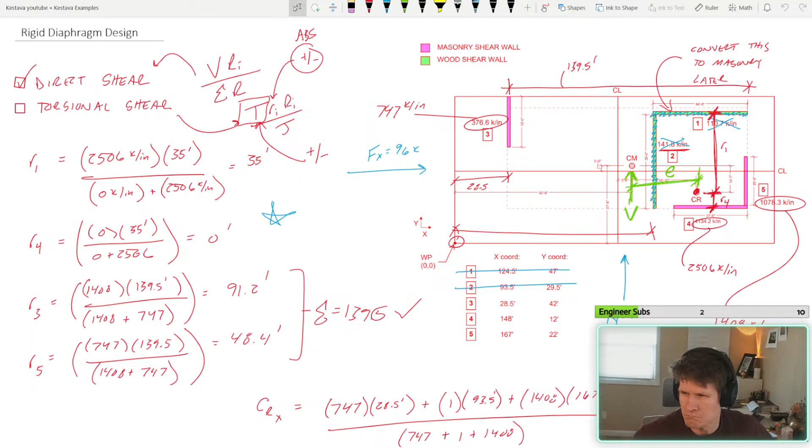Swap over to the spreadsheet. Hey, I'll be back in 2 seconds, I'm just gonna grab my hot water.

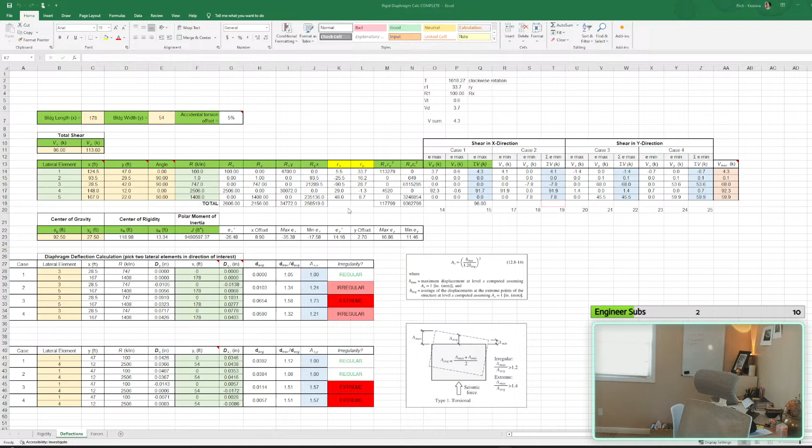Back. When am I planning to take the exam? Believe it or not, I think so. I have the morning portion of the lateral exam and the afternoon portion of the lateral exam decoupled now, so I have to take 2 sessions. I'm signed up for the morning portion, and loosely, I kind of want to take it like beginning of March, maybe first or second week in March. So that's the plan as of right now. So over this month, I'm kind of locking in and going to refresh myself on everything and rearrange my study preparation because it's computer based. That's more of the time I think I have to take, is figuring out the new format. So you'll be seeing me a lot more over the course of this month.

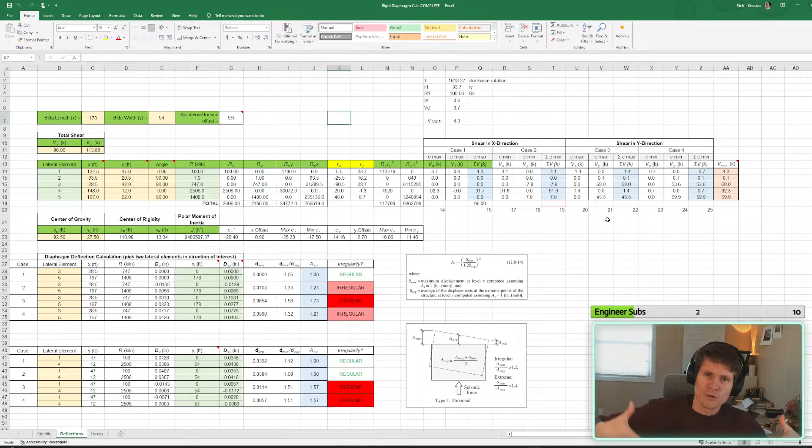This is hopefully something that you see in front of you here. This isn't like a homework assignment. This is something that I want to be able to use in my professional career as one of those tools in the utility belt that just helps you perform better as an engineer.

No problem, Kamala. What's the typical salary for a structural engineer with 8 years?

Boy, isn't that the million dollar question? It's not a million dollars, unfortunately. I don't want to give you a roundabout answer, but it can vary. For structural engineering consulting in the US, it will vary based on where you are. If you're in a more expensive city, the salary should be a little bit higher for cost of living purposes. If you're in a smaller rural area, it will probably be less for that reason.

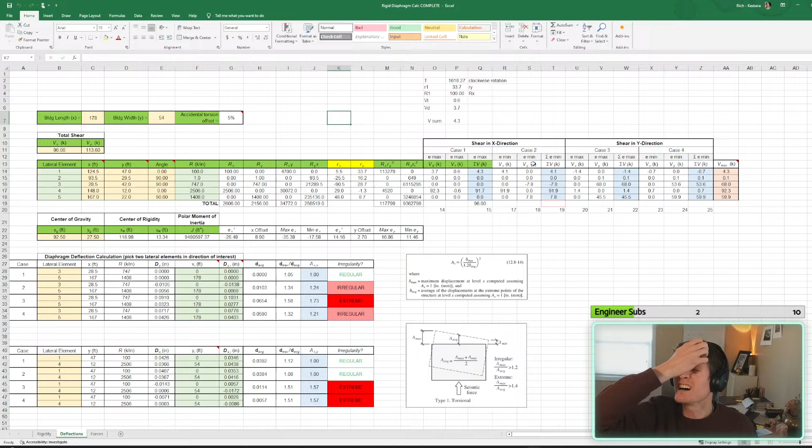For consulting purposes, not anything specialty related, so nothing like a structural engineer for a utility company or a very specific niche system—if it's buildings, 8 years experience, probably anywhere from 90 to 120K range, I'll probably give it, in my opinion, which is kind of sad. I'm at like 105 right now, I think, just at baseline.

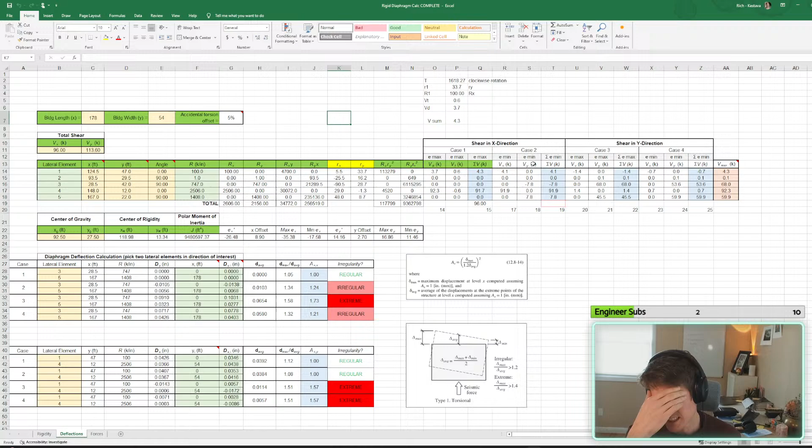Which field would you say gets paid the most in the civil field? I have a couple of buddies—one of them is transportation, one is geotechnical, one is environmental, and then I'm structural, and I have another buddy in structural. So I have a nice little pool to pick from. We're all decently similar.

It'll totally depend on the type of company you work for, but I think my transportation buddy makes the most out of all of us—I think he's like at 130K, I'd have to ask him again. At one point he was pivoting a little bit, kind of drifted from the transportation part into smart technologies, like ITS systems, intelligent transportation systems. I don't want to say techie by any means, but I think there's more money in that sector within transportation engineering, which equated to more potential financial gain.

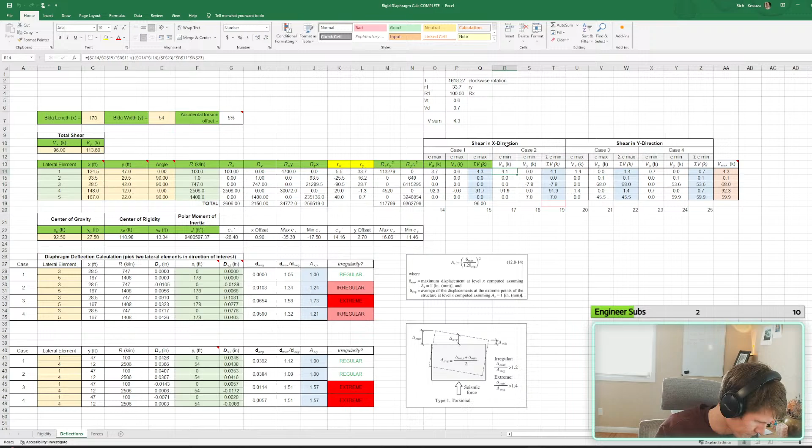Which should be easy enough, because it should just be: case 1 is E max, case 2 is E min. So we should make sure everything's locked in.

That's right, that's our direct, so we don't use our eccentricity.

Hey! Rajan, welcome in, fan of your funny YouTube shorts. Hey, let's go! Someone calling out the shorts. It's the fun little thing that I do on the side that I think hopefully everyone gets is lighthearted and fun. Hey, glad you popped into the auditorium. Oh, Ryan popping in. Hey, what's going on, Ryan?

Sweet spreadsheet? Yeah, we're putting a little something together. Troubleshooting here, not trying to make the world's perfect, all-encompassing, rigid diaphragm analysis, but trying to make something simple that kind of works out. But it was giving me a couple of problems, and I'm fixing it up. So going through it from start to finish, trying to make sure the direction of all of my shear to each of the vertical lateral elements is properly being analyzed in the right direction. But we'll see, we'll see if it all works out.

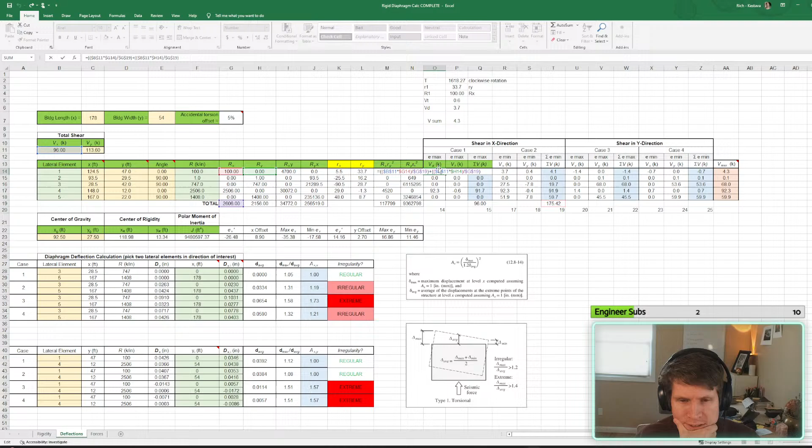I need to be careful here, because I thought last time I could combine both my X and Y together, since I'm only analyzing wall lines that are not at angles. I think that should still work. I just need to bring this down. Oh, it doesn't work anymore.

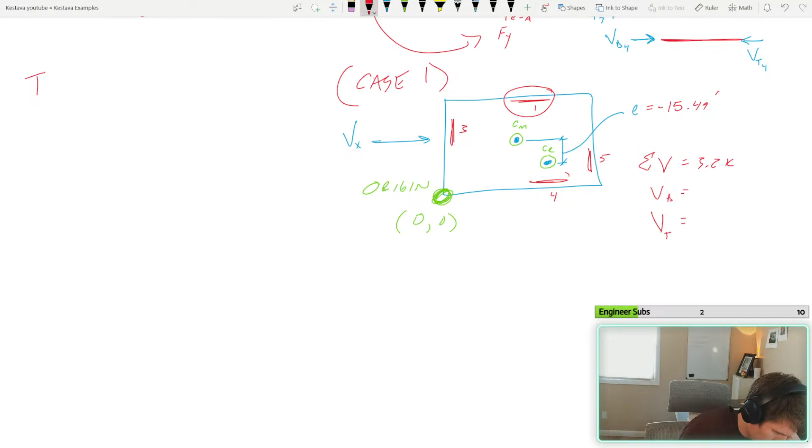All right, so direct shear 1 and 4 should be taken as huge numbers, except 1 is not a lot of stiffness in comparison to 4, 2,500. So 1 is basically going to see nothing in direct shear. Yeah.

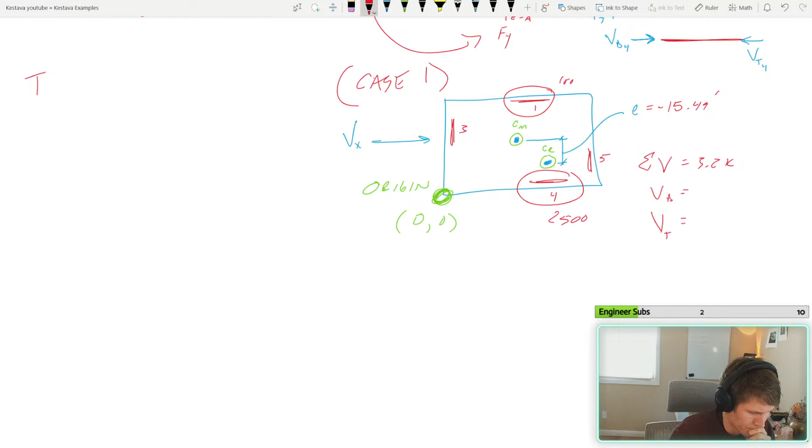Okay, our torsion is happening, so it's going to... Yeah, we have this going on up here. So shear wall 4 is direct is additive and torsional is subtracting for shear wall 4, which that's spot on, and then it's add for that. That works. Okay.

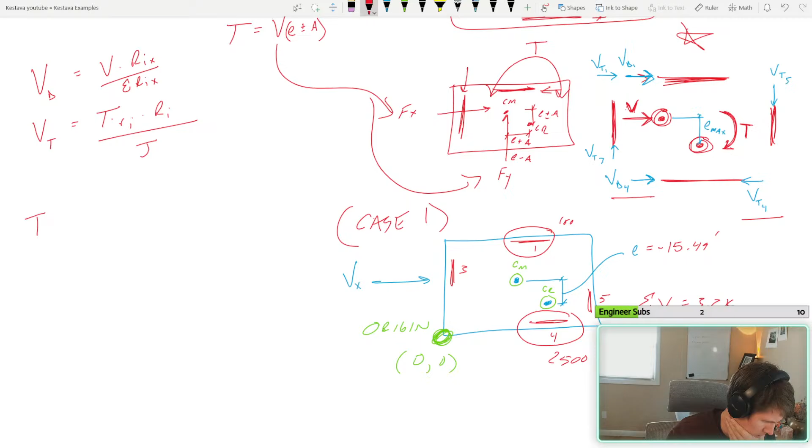And then the only thing for case 2 is we're switching this out for E min. Okay.

Curious, kind of curious, if wall line 1 goes to 1... oh no. That's not right.

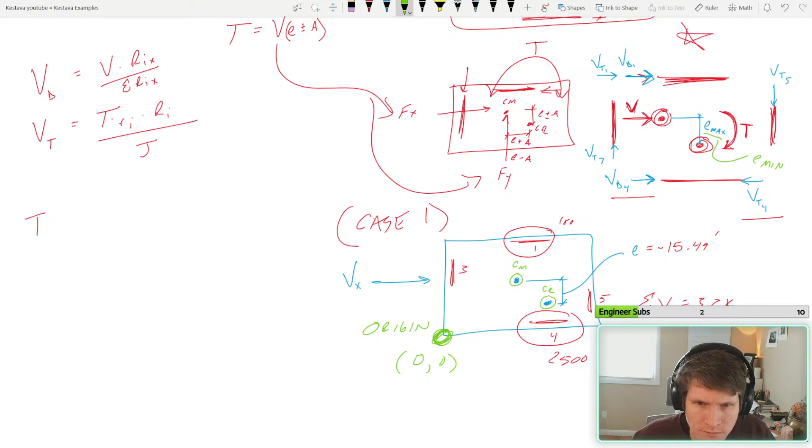Oh, there are values there. See, but I have a problem with that because I feel like all of my walls should be engaging here, at least from the torsional effects. Or I guess...

Because at this point, now there's no wall. So walls 3 and 5 should be seeing some torsional shear. And they should be seeing it in the y direction. That's where I'm like...

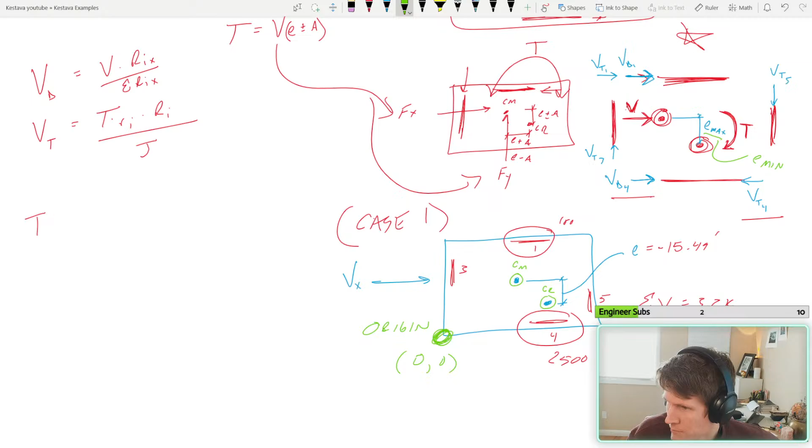Jack, hey, welcome in. Tuning in late, it's all right. You're never late. Did you mention where your sample questions are from? Did you make the spreadsheet?

So I've been building this spreadsheet. I started with one that I didn't think was quite doing things the right way, and so I've been building off of this. I think I'm almost there, but we'll see. I know the results that I'm looking for, but yeah, I was working on this last night, and I'm hoping to wrap it up today in this session.

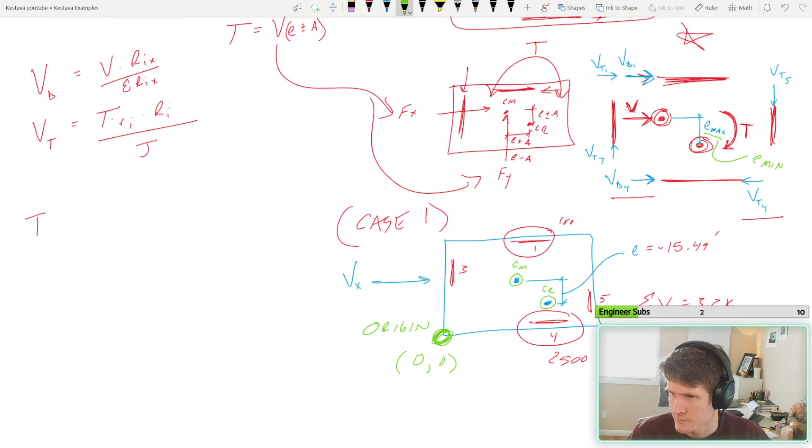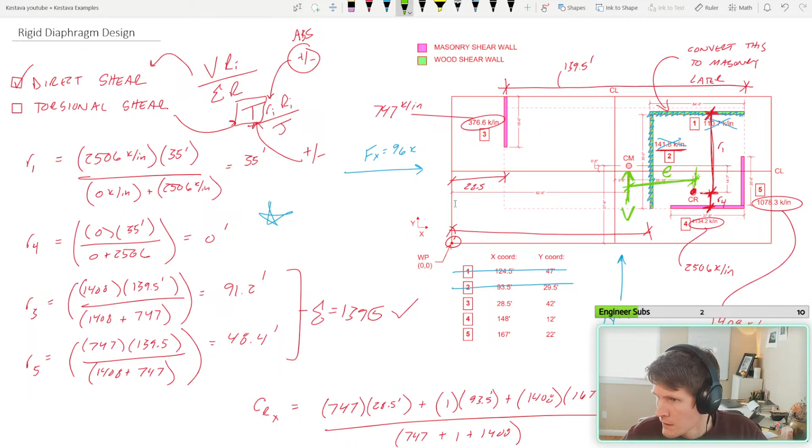But the example is, oh shoot, you guys aren't even looking at this right now, sorry. This is my problem that I have. So yeah, that's the dealio.

I know, there's a lot going on there. I'm kind of just working through this at my own pace. I want to get this locked in for me, and then obviously if people have interest to this, I'll do my best to relay it to you and the things that I've done.

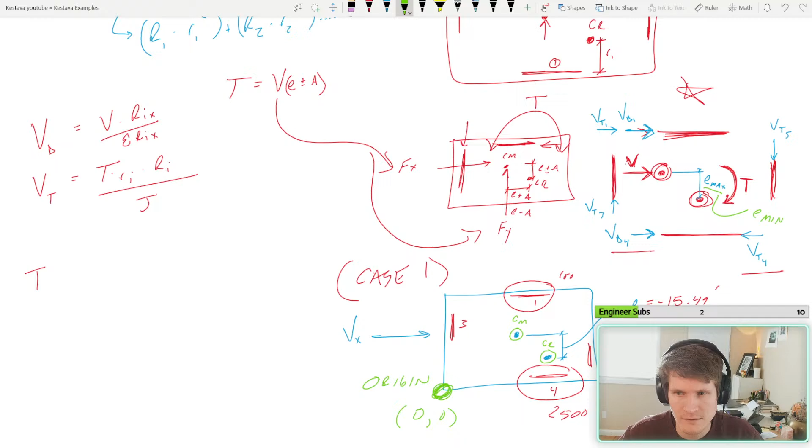And for anyone from last time, like if I switch this, if the summation of these loads don't equate to the total story shear in the direction that we're analyzing, then we have a problem. So I have this little conditional formatting set up. So if that flares up, we can visually see that there's an error, but we're locked and loaded right now, so that's good.

All right, case 1 and case 2 are done in my opinion. Let's green them up. All right, now we're moving into shear in the Y direction. Very good, very good. All right.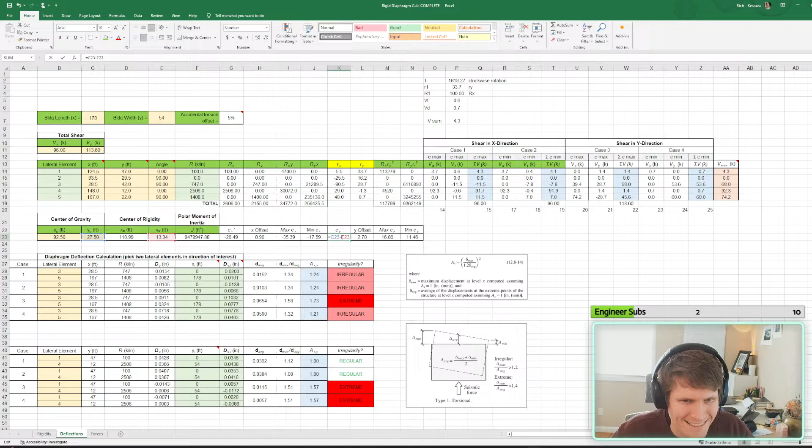Shoot. So is this technically absolute? I hate putting absolute in this. Technically, this needs to be... and now these are reversed again.

Okay, so I'm gonna flag this as yellow, I need to think about those. These are fine, those I get, that's okay. Now, you should be seeing that and that, just adding to it.

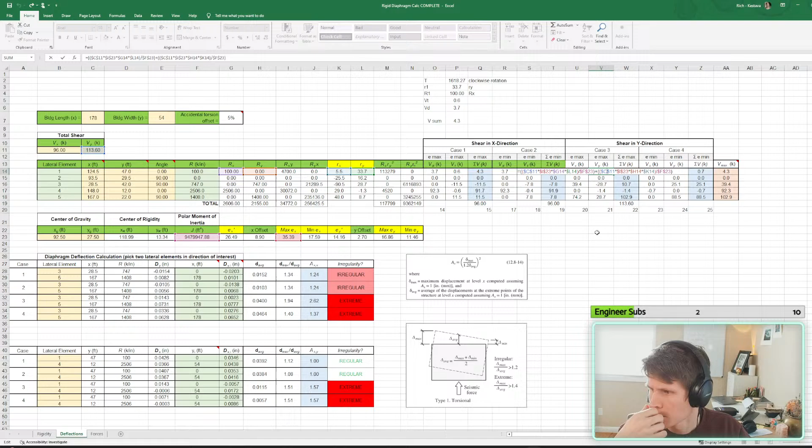Yeah Kevin, that's something I gotta figure out, this is something kind of new, I want to start sharing things that I have, use, create. I just need to think about it and be careful of what that entails. I don't want to be saying that this does something and then it doesn't. This is just me messing around. So if you send me an email, yeah, I could send it to you direct, totally.

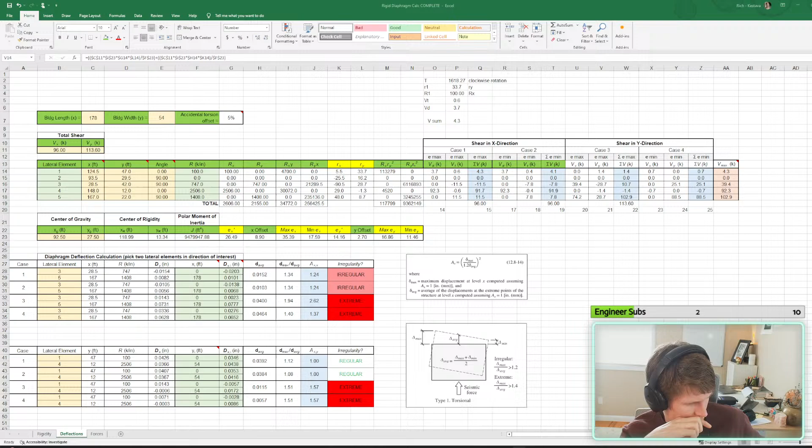Unless I'm like tripping? Not tripping? Should be.

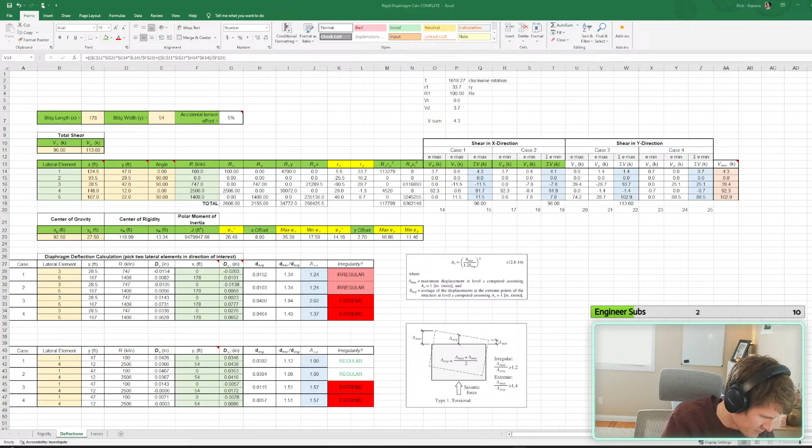Oh, I already got it. It's gonna be minus, plus.

V1 is plus, V2 doesn't exist, V3 is minus, V4 is minus, V5 is plus. Okay, so that works like that. Those are working.

Why are you not working? One should be plus. It's good. Okay.

All right, so 1 is plus, 2 is 0, 3 is plus, but it's minus right now. Why is this minus? Oh, because my Rx is minus.

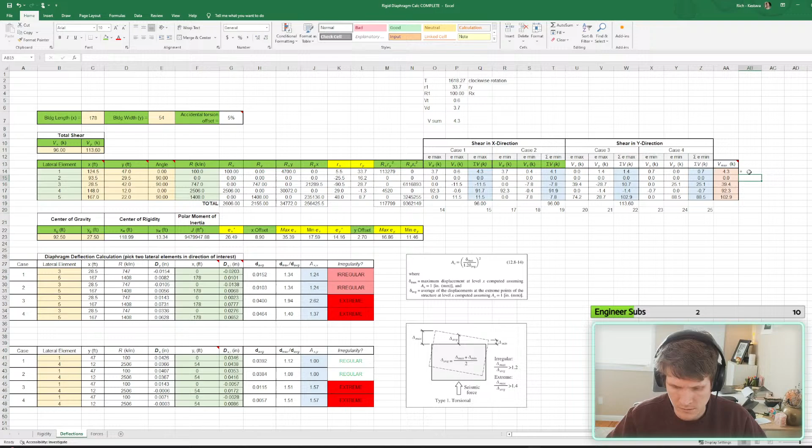I'm just gonna do this, just so I remember. So plus, just nothing. Three should be plus. Four should be minus. Five should be plus. Okay. Like, so, yeah.

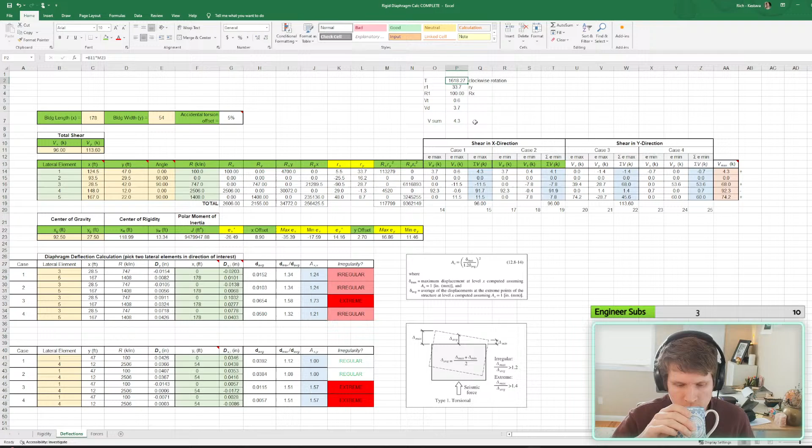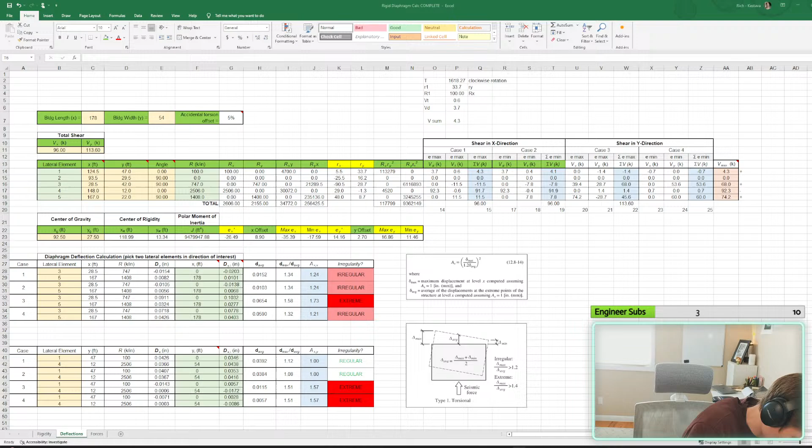One of my problems is I feel like I should be utilizing that clockwise is negative, which means that this should be a negative number, which means that should be a negative number. So it should be taken from that, which means that these also are reversed. I mean, it would just mean reversing everything.

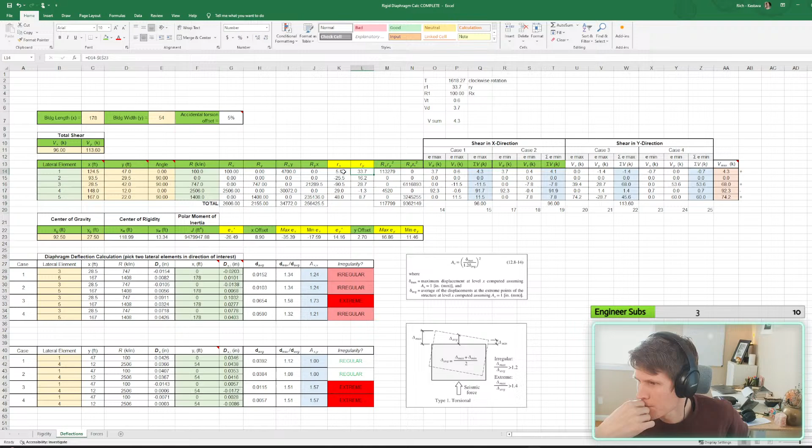Joey, welcome in, Joey Falcon, that's a sick name. Did I ever consider bridge design instead of buildings at any point in my career? Actually, my whole life as a kid, that's where my love of structural engineering came from. I thought bridges were the coolest things in the world. I messed around and tried to build little bridges over rivers and stuff all the time. I always loved being in a car driving over big bridges, any type of bridge really, but bigger bridges obviously were way cooler. So that's where it all stemmed from. And then actually, unfortunately, in college I took a bridge engineering class, and it was so chaotic that it just kind of shell shocked me into being like, whoa, I don't want anything to do with bridges. So I unfortunately lost my flavor for them, and that's where I decided, from that point on, I'm not going to look to do bridge design. That's not to say I don't love building design, I really just as much love skyscrapers, tall buildings, I always had a passion for that as well. So I have worked on some bridge stuff here and there, nothing major by any means, but now that I'm a little more open-minded to learning things, not being scared of things, I would love to get involved with a bridge design one day. So, yeah.

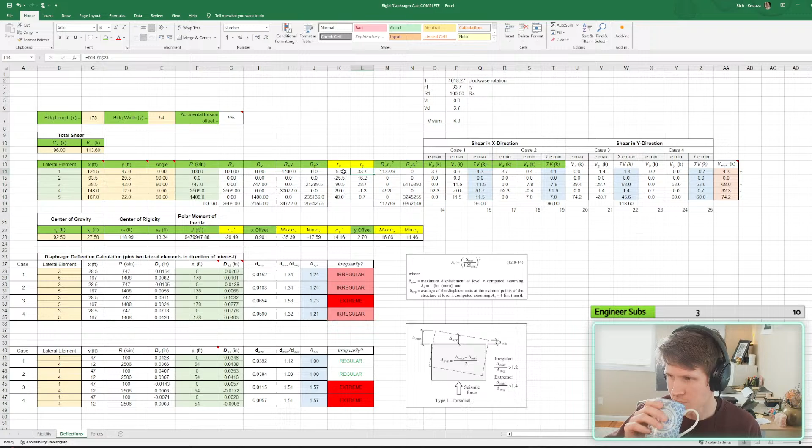I'm gonna screenshot this. Let's see.

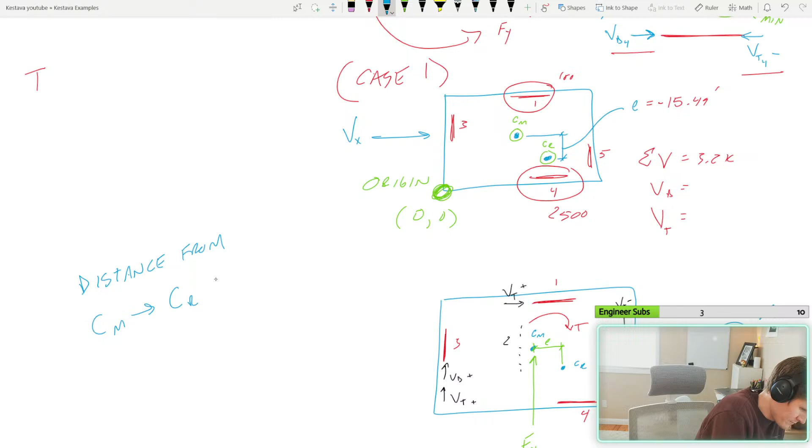Would mean it would be, we're going down, so it would be negative.

Okay, reverse. Out of there. Oh, was that my only problem? And we'll figure it out in a sec.

So in that case, so it's negative, so it's CM, center of mass, so it should be minus center of mass. Minus center of mass. Center of rigidity.

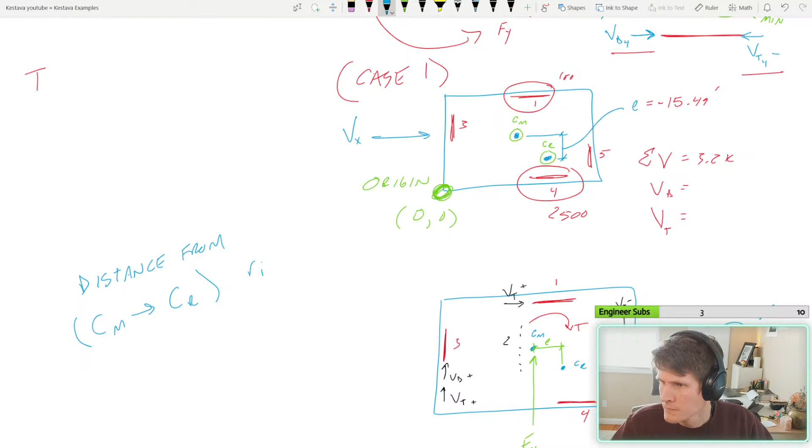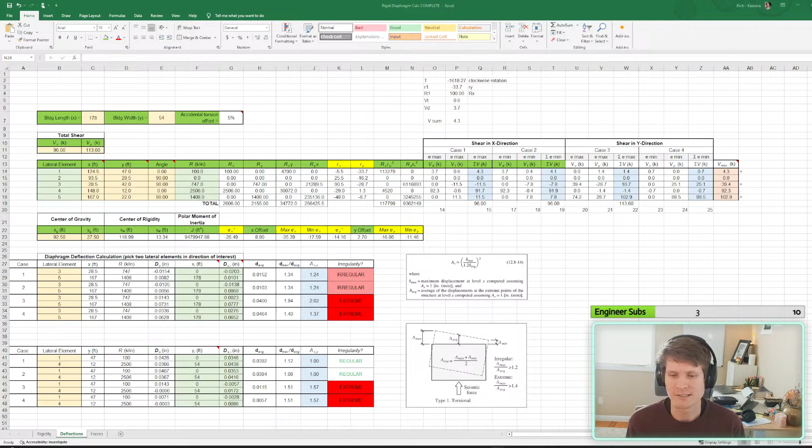You're currently in your first year of work out of school and work at a firm that allows me to do both, however not sure if I would benefit from focusing one or the other. No, I was at a firm that did both. So if you have the opportunity to get exposure to each of those types of designs, I'd say that's a great starting point, as long as you obviously like the company. Having a portfolio that encompasses both isn't rare, but it's not common either. So to have the ability to say, hey, I want to work on a bridge, or I want to work on a building, and then talking to your principal or project manager and them being able to supply you one is pretty clutch, because you'll learn more quickly, because you don't have to wait for a project to arise. It could be years down the road to get your chance to work on it. So yeah, I think that's good.

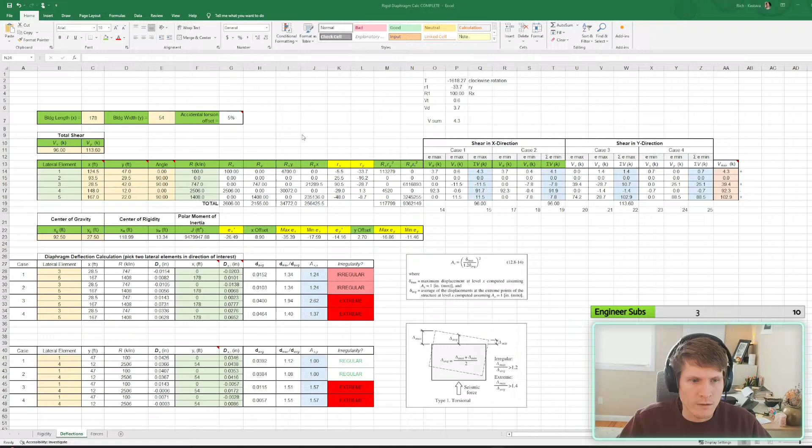All right, now we're rolling a little bit here. I'll zoom in, I don't know if anyone can see all right. Okay, now my clockwise is accurate. It's negative as we're doing clockwise.

My problem is these aren't, my eccentricities are—I'm gonna go actually red, let's fill them in red. These are not great because I had to swap them based on, to make them work to get the correct things, which isn't good, because if these center rigidities and center of mass switch orientation between one another or relative to one another, it's gonna create an error in my spreadsheet.

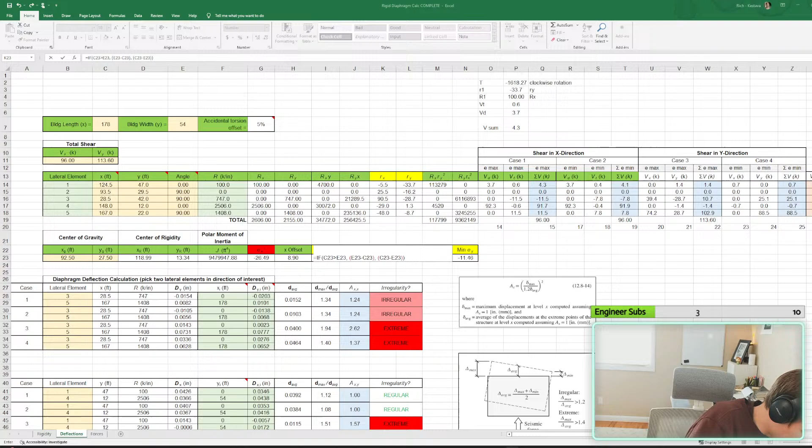So if this is greater than this, then it's going to be this minus this, which gets you a negative number, so that's good. But if YG drops below YR—so if your center of mass drops, I'm drawing over here to the side, sorry—if that drops below, CM is less than CR, then that's going to create a counterclockwise torsion, so that's positive. So we want our E to be positive. So then it's going to be, so...

If this gets less than YR—no, that should still work. Then it's still the same thing. So it would be like if this was 10, like here, we know this won't work because if this goes to 10, it's still going to be a negative number, which doesn't work. Drops below, then it can still just be, I don't have to be fancy with this. Because if this was 10, then it'd be positive. Yeah.

Okay, so that one works.

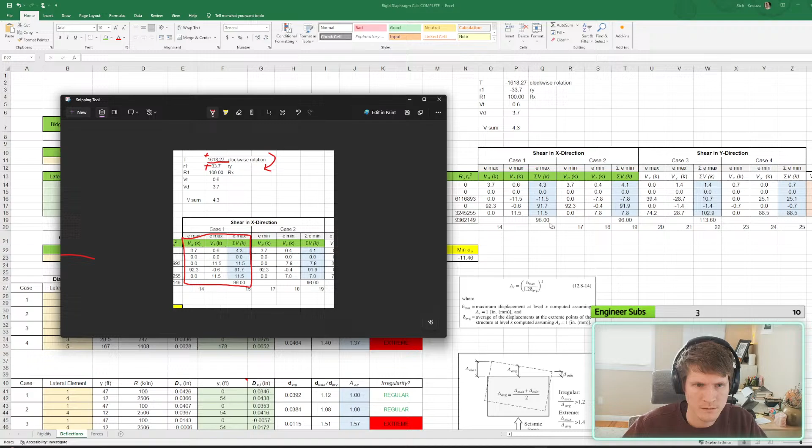Just confirm, I took a snip of my old, my old values, just to make sure I didn't want to lose track. So we are, I'm just checking these out. And see, as you can see, it used to be positive, but that wasn't indicative of the direction of the torsion. So positive or clockwise should be negative, counterclockwise should be positive, or should be positive. Yes, so now that's running right, but I fixed everything and it still gets you the same answers, at least for the first cases, and I just need to figure out the other cases. Hopefully it fixed everything. So those are good. Okay, get this out of here.

So with that being done, positive, negative, positive—what is going on with this one? Oh, no.

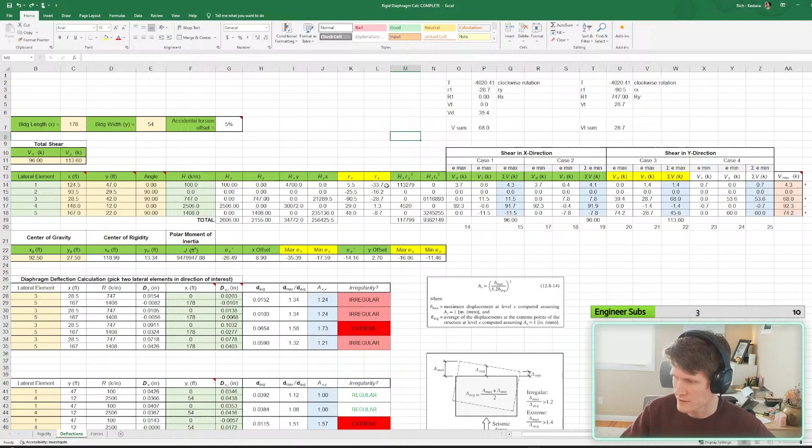That's correct, but this can't possibly function right now, right? Big nasty, I totally hate doing that, man. That's what I'm not looking forward to, having to go electronic for the SE as well.

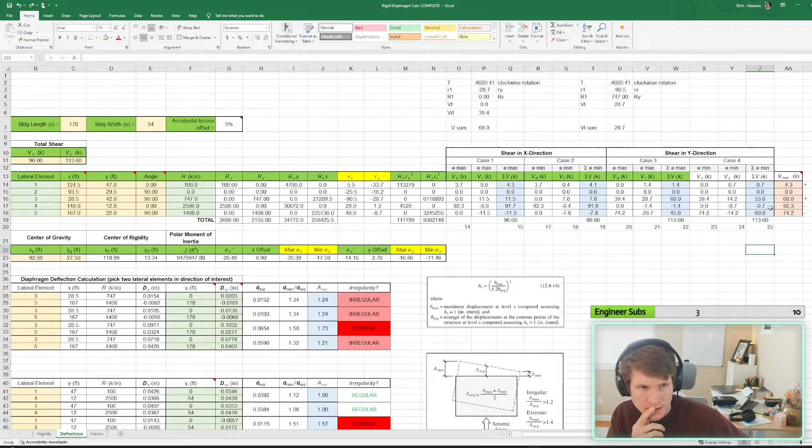One's gonna see a little, nothing there. 3. Three's gonna see a lot. Yeah, these are unchanged, it's just the torsion that switches. Okay. Okay.

And then you just want the max of that, comma that, comma that, comma that. There you go. Okay, I'm gonna hit save on this.

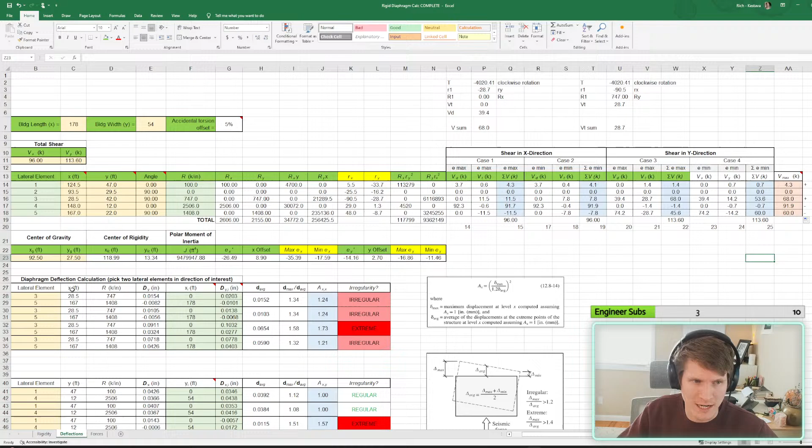So what I'm doing at the end here is taking my Vmax, so it is the governing of each of the 4 cases for each shear wall. And then I will design my shear wall for that max shear. But that's as far as I'm gonna take that, but I need to keep these 4 blue cases separate because then I need to use them independently to check my diaphragm deflection so I can check my irregularity.